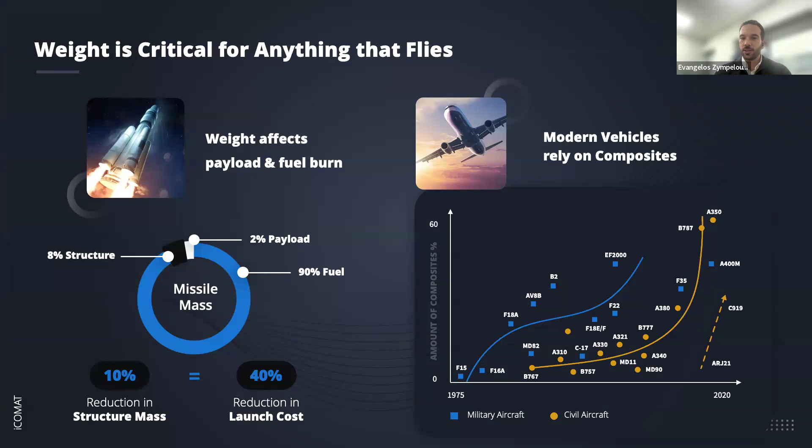And that's what we can deliver with iCOMAT. We can do so for the entire structural stack across defense and civil aviation, so anything from the wings of a fighter jet to interstages of commercial launchers.

And the way we do this is really by going back to the basics with carbon fiber and composites. As we all know, every composite part starts life as a textile. Composites are made of millions of very strong fibers. And really the peculiarity with these materials is that they are only strong in the direction of the fibers.

So the way we design and manufacture today to really compensate for this is by stacking straight fiber layers at different orientations, and this gives us roughly the same strength in the key directions. But the structure is never loaded the same in the key directions, so you end up placing a lot more material than you actually need.

It actually would be far more efficient if you could steer the fibers, and in such a way you could reinforce a structure only in the critical areas. This could give us components which are not only lighter and perform better, but also require significantly less raw material, so they are cheaper and faster to produce.

So this whole idea, this concept, got known as fiber steering in our industry. It was originally proposed by NASA in the late 80s, and there's quite a big body of literature on why fiber steering is better and why we should be designing and manufacturing composites like this. But the big bottleneck always has been manufacturing.

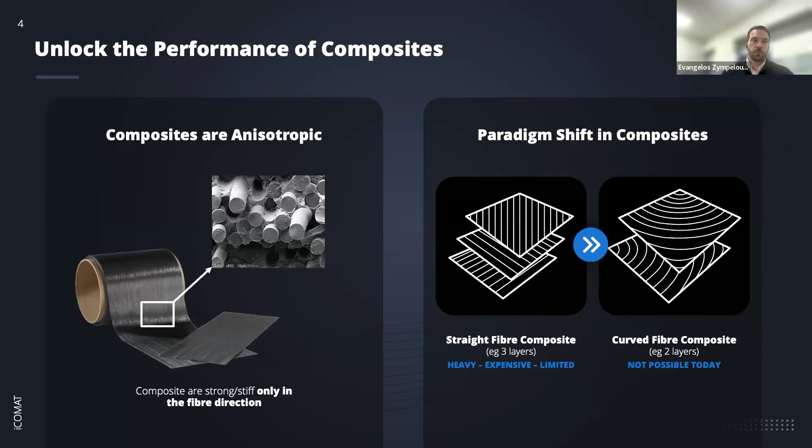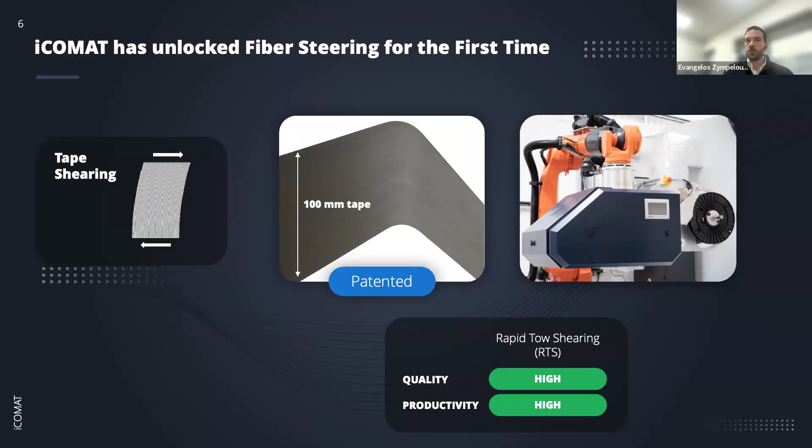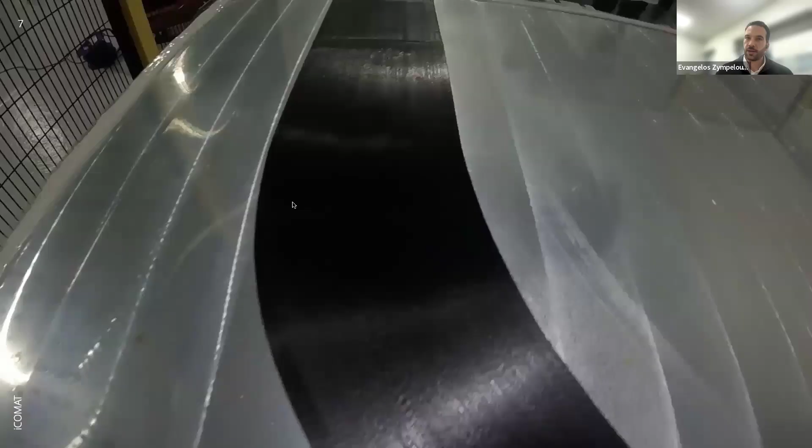So you see here our generation 1 system, steering 4 inches wide, aerospace grade prepreg. This technology is based on 10 years of academic R&D at the University of Bristol, and then 6 years of industrialization at iCOMAT. And as you can see from the close-ups, really the quality is excellent.

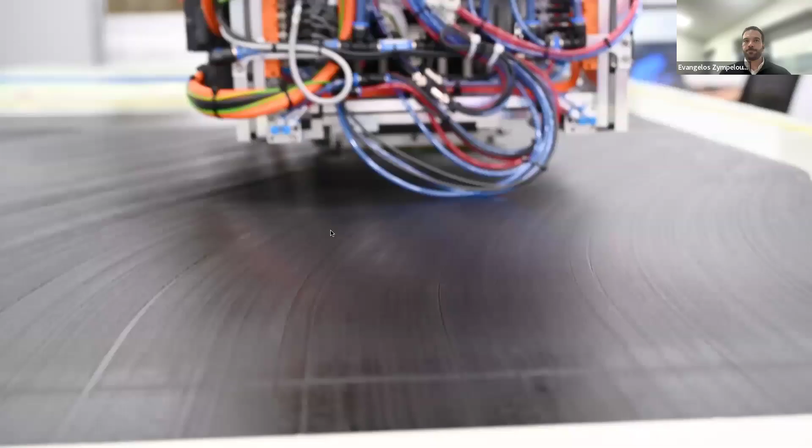For those of you that work with AFP, the difference with our process, aside from individual tapes, is that you can also place one tape next to the other steered tape, without any gaps or overlaps. Again, something that is not possible with existing processes. So all in all, this is the world's first technology that can actually produce defect-free fiber steered parts.

And what you see here is a generation 4 tape lay-up system. This is our latest machine, which we released about 2 weeks ago. And what you see here is straight line deposition at 1 meter a second. A fiber steering demo will follow.

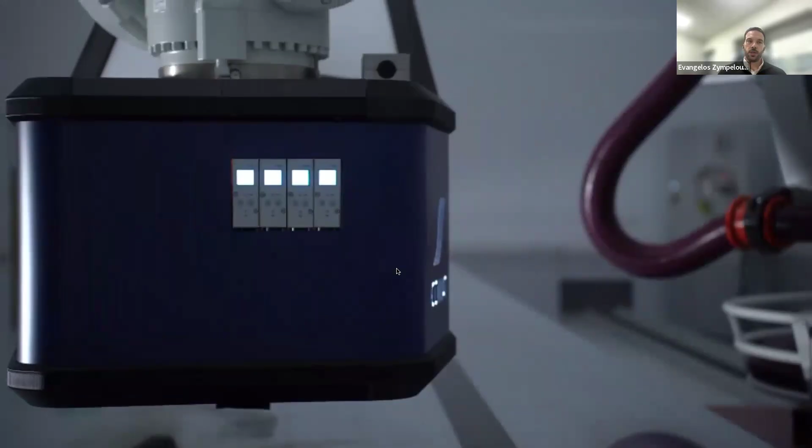Now I have to stress, because with our process we have to effectively modify the tape to steer its fiber path, and we do this by using shear deformation. Every subsystem of the head had to be developed to an extreme level. To give you an idea in terms of heating, it's the only tape lay-up system in the world that uses an infrared LED heating array, about 150 individual LEDs, and this gives us tremendous control over the temperature profile.

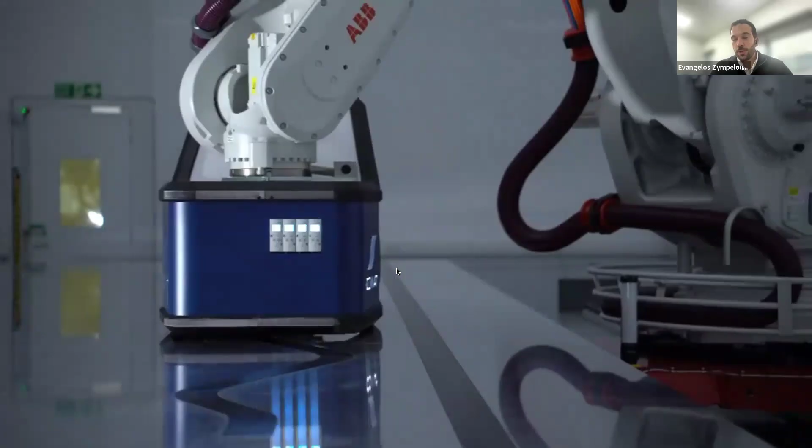So what you see here is quite phenomenal, actually. It's steering at 0.7 meters a second, and the radii that you see are less than 200 millimeters. So it's orders of magnitude faster and tighter steering compared to an AFP, and is absolutely defect-free.

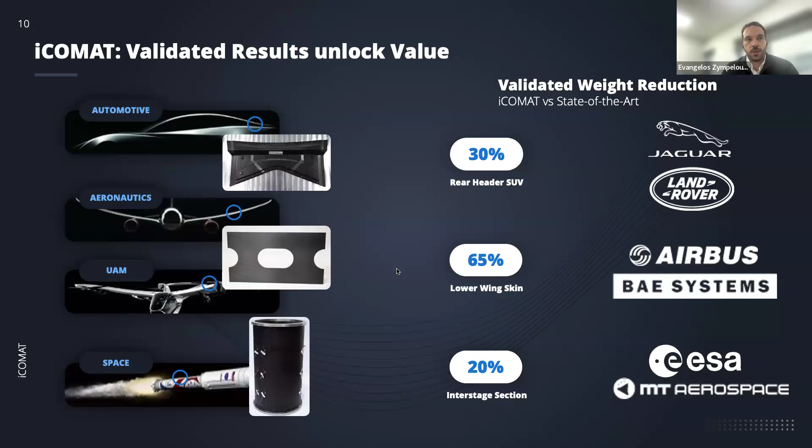So why does this matter? There are two really good reasons. The first one is structural efficiency. By placing the fibers directly on the load path, we can drastically reduce the weight of structures. And it's best to illustrate this with an example.

So what you see here is work we did with Airbus on a program many years ago. It's the lower wing skin of an airplane. You've got what is known as the manhole plank, so literally a man has to crawl through these holes to inspect the fuel tanks and internal structures. But the wing is loaded in bending, so you want the fibers running straight across the length of the wing. But you've got all these holes and you're effectively cutting the fibers, which creates a huge stress concentration.

Now, it's not hard to imagine what we're doing with steering. We're effectively steering the fibers around the hole to eliminate that stress concentration, and that allows for a drastic weight reduction. We're talking 65%, and that's using the same raw material that's used in production today.

So they liked it so much, they said, okay, can we try to replicate that design with existing fiber placement systems that we use today? And the result is what you see on the bottom left-hand side of the slide. It's full of localized buckling and wrinkling, which are localized defects that not only reduce performance, but also make it almost impossible to certify.

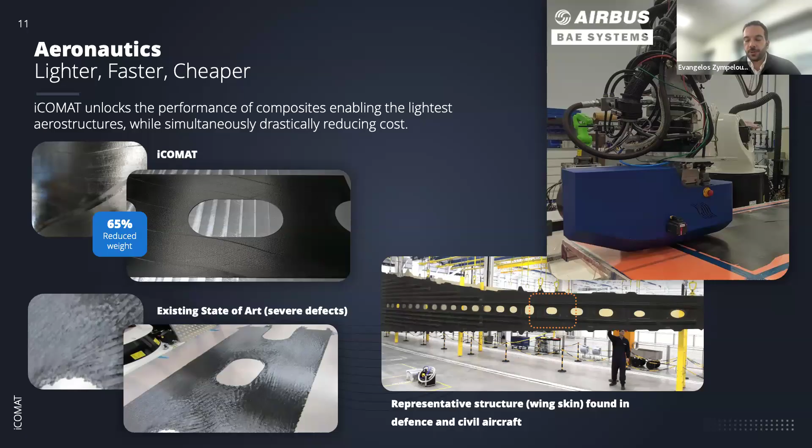And these are some of the results. So with our technology, which is RTS, which stands for rapid tape shearing, we're able to achieve 3 times the load to mass ratio compared to the QI laminate that's flying today.

And we've done a lot of work also on similar structures for space, which was one of the very first applications of fiber steering. We've recently produced and tested the world's first fiber steered cylinder that outperformed the best straight fiber design. The benefits were very well documented in the literature, but nobody could realize them in a test result because of the defects you get when you manufacture fiber steered structures. But we actually did a defect-free cylinder, achieving 24% higher buckling load, which translated into about 20% weight reduction.

And crucially, we massively improved the reliability load by 300%. I won't get too technical, but effectively this is a key measure in space structures, which determines how sensitive the structure is to imperfections or damage. So effectively, it's a much safer way to design with steering because you know exactly how the load travels through the structure.

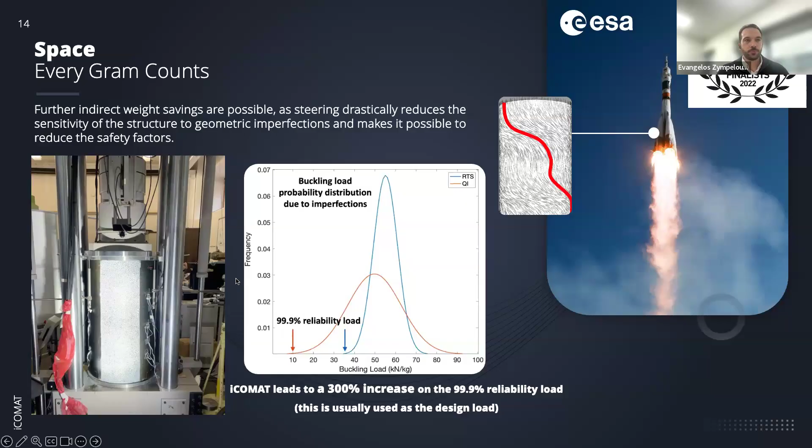Now, the second advantage of steering, and probably this is even more important, is that with this technology, you can really unlock industrial production rates with composites really for the first time. And the way we do this is by leveraging a workflow that's been used in automotive for decades.

So the way we make cars today is by stamping or forming. We take sheets of metal, put them in a press, and off comes a component. This works really well with metal because metals can stretch in all directions, but carbon fiber doesn't stretch. So if you try to form anything complex, like the fuselage of a fighter jet, it's really like taking a piece of paper and trying to wrap it around a football. It will create lots of wrinkles.

So what we do is use software to predict where those wrinkles are, and then we pre-steer the fibers in 2D so that you can stamp form the component in 3D without any defects. So we can effectively engineer stretch into the 2D preform, and that allows you to produce many times faster.

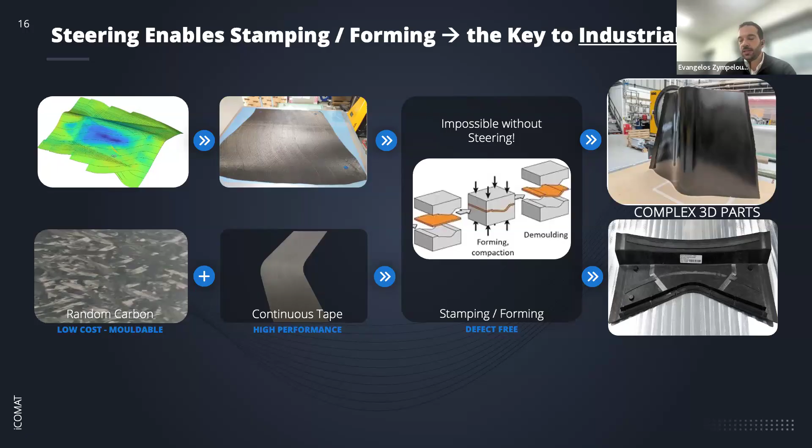So again, best to illustrate this with a couple of examples. The first one is a fuselage frame, or a curved beam. It's a representative geometry that's widely found in civil and defense aviation. You've got about 900 beams like this reinforcing the fuselage of a commercial airplane, and you've got many curved beams in the wings from spars and ribs.

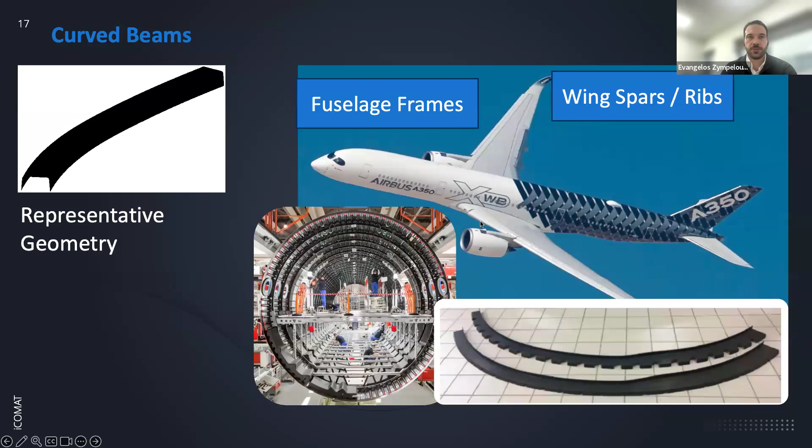Reinforcing the wings. So effectively what we did here is we didn't change the design. On the final 3D part, it's the existing QI design that's flying today, because that was one of the requirements of this project. But what we did is we took that plybook and from a 3D geometry, we projected it into 2D.

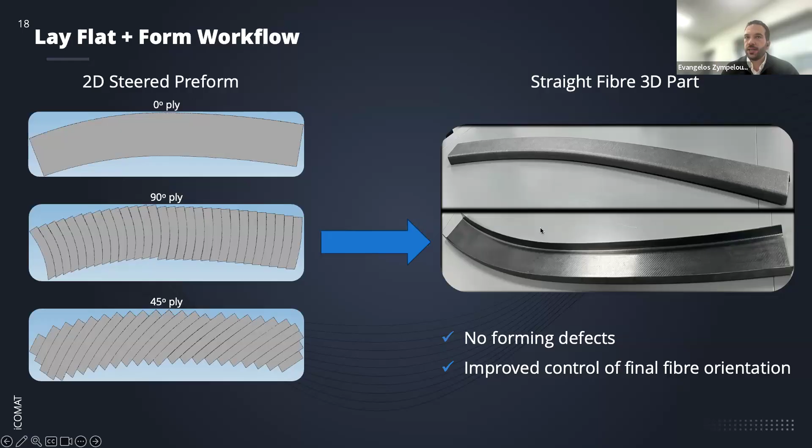You will see here that pretty much every single orientation required a degree of steering. That happens because this is a doubly curved shape, so when you try to form it, the fibers are moving. So we're pre-steering in 2D so that the fibers end up in the correct place on the 3D.

Once we do this, we use our CAM software and program the machine, and let it run. In this case, it did about 21 layers all in one go. Also, you'll notice we have nested multiple frames together.

So this preform here can do about 3 fuselage frames. Then we ply cut its preform, and in this case, we use the hot drape forming system. The result is a defect-free beam that you see here.

Now, if you try the same workflow with a straight fiber preform, everything is the same—material, forming system, mold, everything the same. The only thing we change is instead of a fiber steer preform, we started with a QI preform.

And this could be the result. It would be full of localized wrinkling and buckling, which are these defects I mentioned previously. So this workflow that you saw is really not possible today.

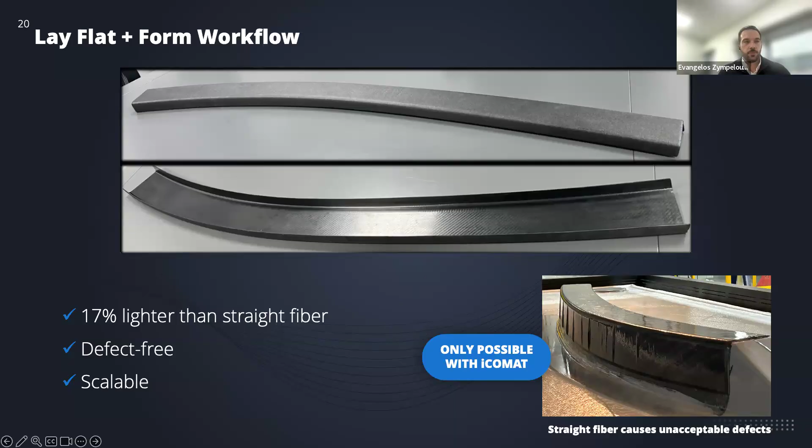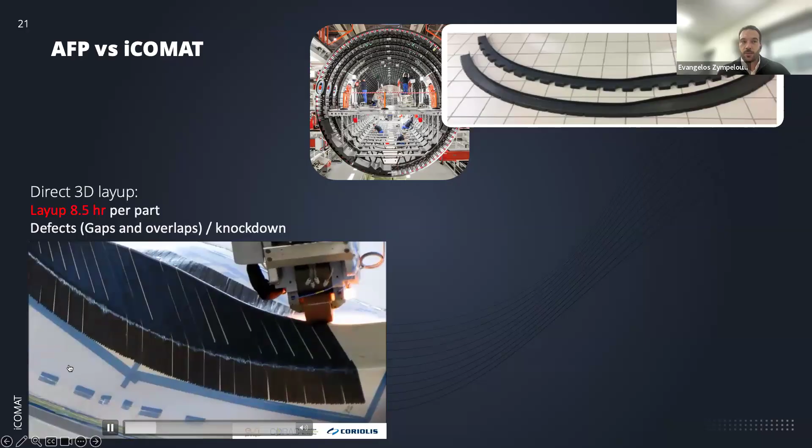One of the most common ways of manufacturing these frames is using direct 3D AFP. The issue is, if I freeze here, you see there is a lot of localized buckling as you move from one face to the other, irregular gaps, which effectively, to certify the structures, the most common way is to add about 30% more material to improve the allowables.

But aside from that, added weight and waste, it's also very slow. It takes about 8.5 hours to do 21 layers using this system.

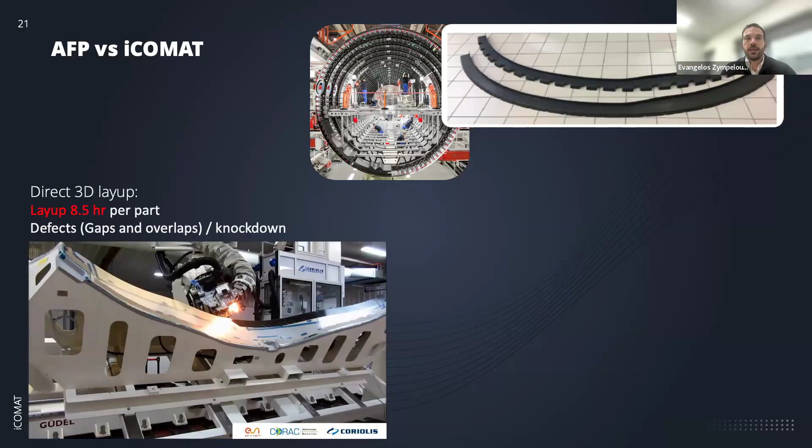So if we use our lay, flat, and form approach while using very wide tapes—we're talking 8 inches wide—then we can do the layup for one frame in about 5.2 minutes. So this is really going from 8.5 hours to 5.2 minutes.

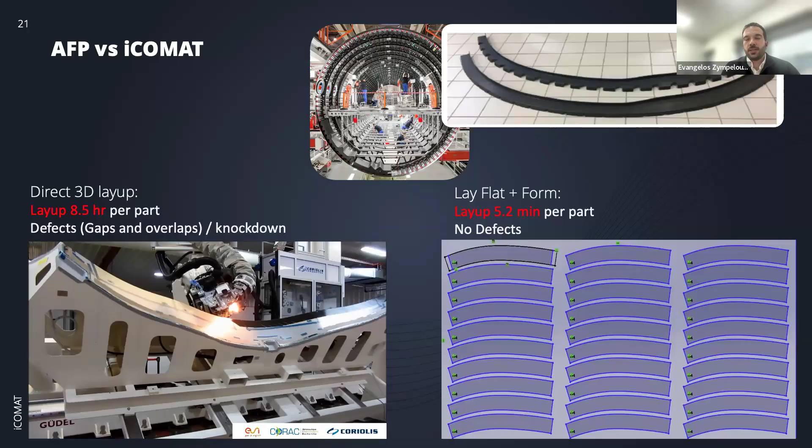Here you have defects, here you have no defects. So we're not talking about a 2% improvement here. This is an order of magnitude improvement in terms of production rate and also cost.

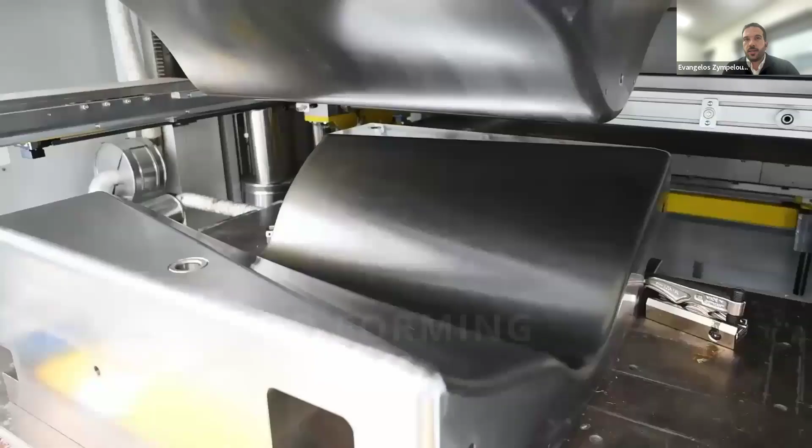Another quick example, this time from the rear fuselage of a fighter jet. Same approach: we do the design, then run a forming simulation, do the flat stack, and in this case use a stamping system. This is a heated press, so you cure while you press at the same time, and really it's beautiful. It's lighter, it's cheaper, and we made this 10 times faster compared to the nearest technology.

So where are we going with all of this? Really, the vision here is to create the world's first lights-out factory for composites. We're not there yet, but we have all the necessary building blocks now. And there are two main streams.

The first is the hardware. I believe we're the only manufacturer in the world that makes their own tape laying systems in-house. This is a key part of our technology stack, and it's the only tape laying system that can fiber steer, which makes all of this possible.

And then everything else we buy commercial off the shelf. We also have a dedicated software team that creates what we call an end-to-end digital thread that connects the CAD, finite element software, forming simulation, and the programming of the machines.

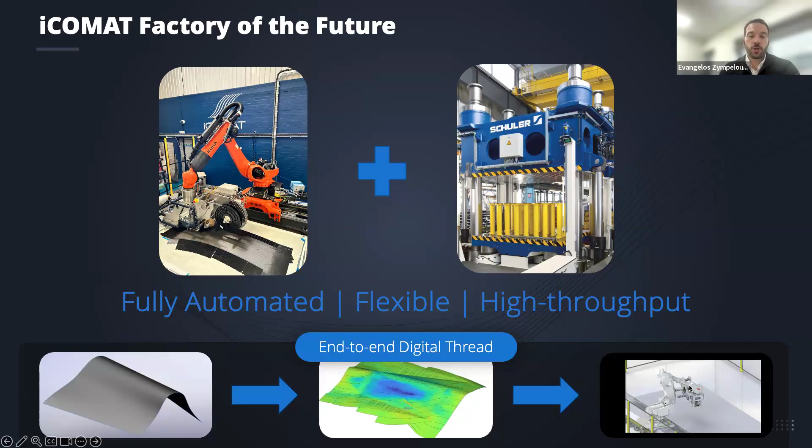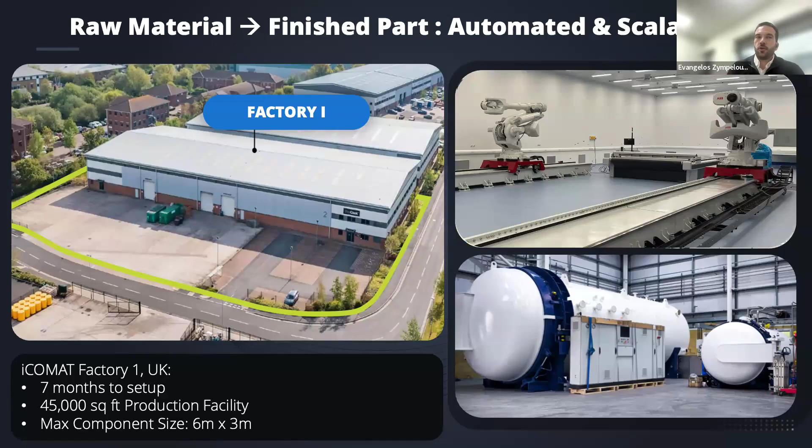So we developed our first factory, which is in the UK. We call this Factory 1. We did this in really no time—it took us 7 months from the moment we signed the lease. It's 45,000 square feet and it has end-to-end capability. So you can literally go from the raw material and now it becomes a finished component.

I'll give you now a quick preview of the capabilities. As I said, we have a design and software team, so we can do pretty much any design step that is needed, from the initial CAD all the way to having the machines programmed.

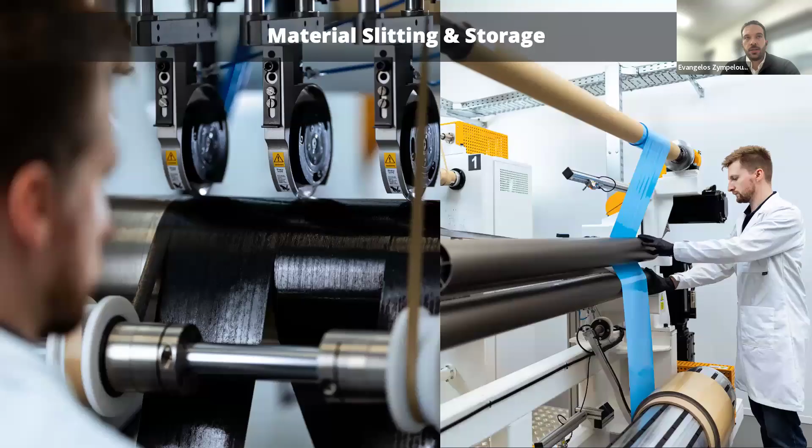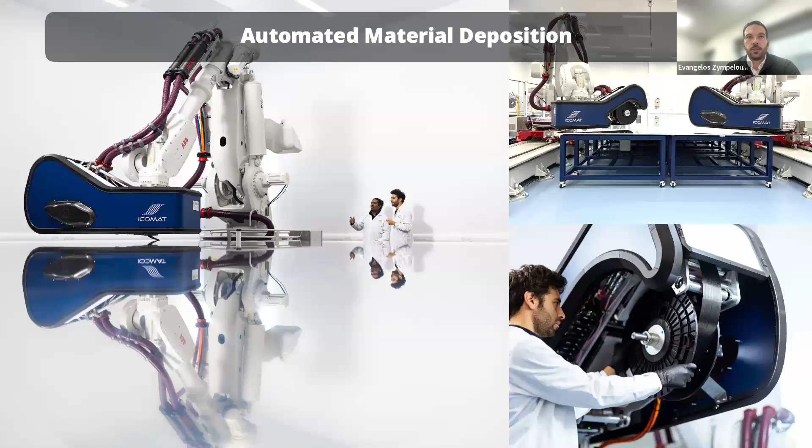We have slitting capability, so we can take the initial parent roll and slit it to narrow widths that fit into our tape laying systems. We have the capability to do tooling, whether it's metal or composite. We have multiple tape laying systems—about 4 live at the factory, and they're all fabricated in-house. This will soon be 6.

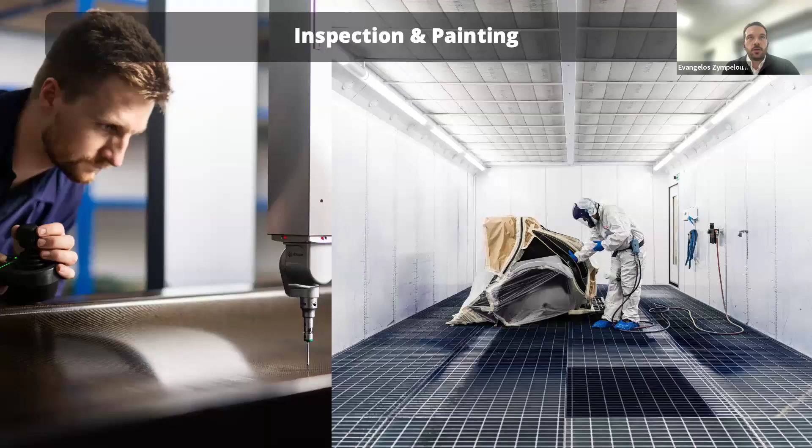Two large autoclaves, two presses, a hot drape forming system, a lot of inspection capabilities, and we even have a paint booth. And lastly, a very large clean room that can also do manual laminating. So as I said, the whole idea here is that we have complete end-to-end capabilities, from the raw material to a finished component, painted and inspected.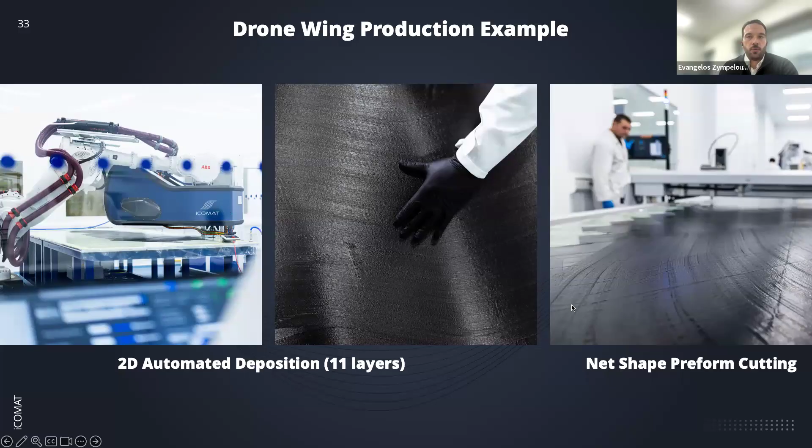I'll give you a quick preview of how this could work for the production of a drone wing. After the initial optimization, we program the machine and let it run. In this case, it did 11 layers in only one go. Then we use a ply cutter to create a net shape preform, laser projection to align it on the mold, and then we cure it in the autoclave. All these steps, aside from moving the preform from one station to another, don't require manual intervention. That's the workflow we want to refine to create the lights out factory.

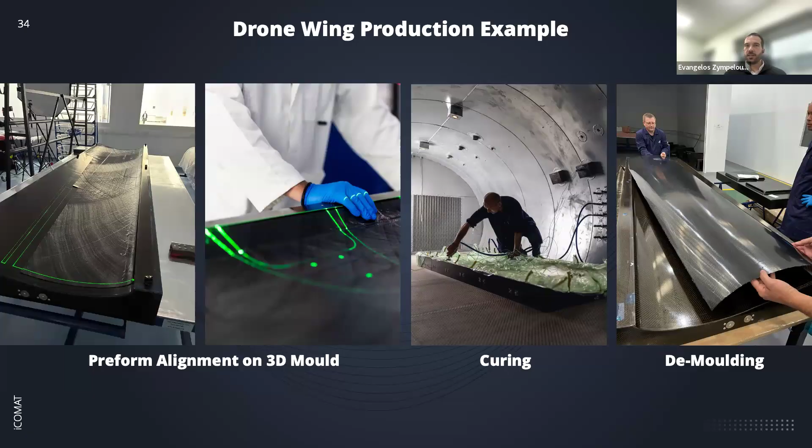So this is a quick preview of our technology and capabilities. In terms of the company and its size, we're about 80 people now. We've got an R&D center in Bristol, our factories in Gloucester, and a software team in Athens. We're in the process of setting up our initial facility in the US.

All this was made possible by a funding round we completed last year. That was our Series A, and it was actually the largest Series A ever in composites. It was led by a US fund called 8VC, and it was the first direct investment of NATO into a private business. We will be raising again early next year with Series B. Our main aim is to set up Factory 2, which will have the latest generation of iCOMAT systems and will take us all the way to a lights out factory.

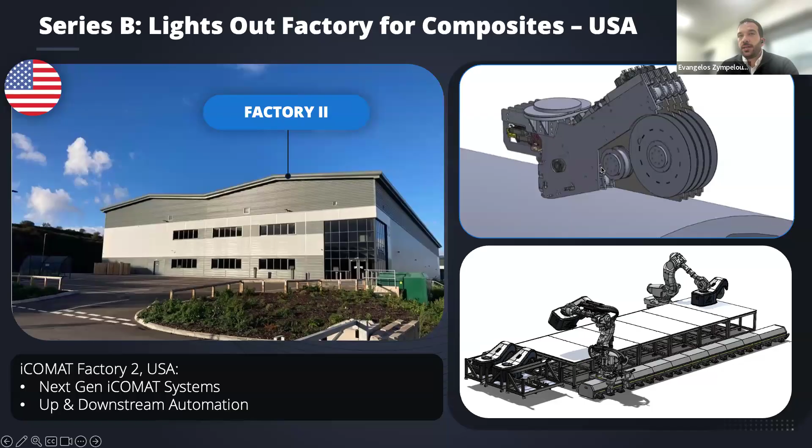So this was a quick presentation on iCOMAT. I think, Jason, we have time now for some questions, if there are any.

Quick question for you: is this applicable to both thermosets and thermoplastics? And can you speak a little bit to the types of materials you've worked with?

At the moment, we're working primarily with thermosets and dry fiber. We have worked with thermoplastics, mainly some systems by Victrex, which are relatively low melt for thermoplastics. The technology is applicable for thermoplastics, but we haven't developed a dedicated head for it. So we're focusing on thermosets and dry fiber, and there is potential for thermoplastics.

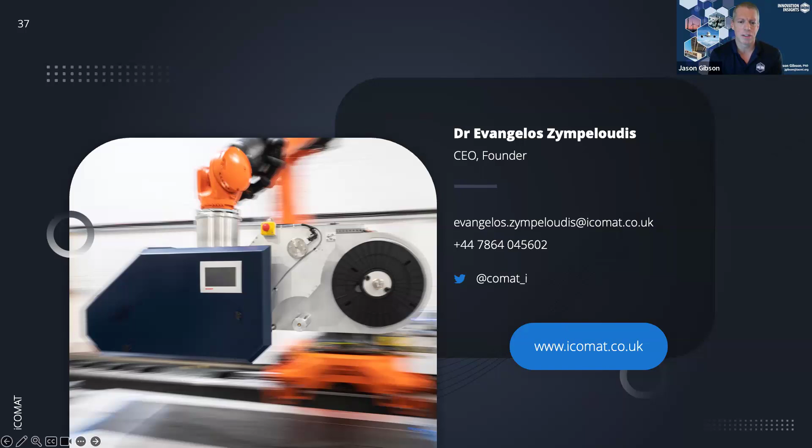Well, thank you very much, Jason. And Evangelos, great presentation. Let me share my screen. Hopefully people can see that. Yep, we could see it. It looks great. Okay, good.

I wanted to talk about our optical metrology technologies, utilizing AI to do digital measurements of materials, structures, and processes to really bring quality upstream in the manufacturing process, making manufacturing substantially more efficient with less rework, scrap and defects, making better quality parts as we move forward, applicable to all composite workers.

Thank you, IACMI, for putting this on and allowing us to present. Trilion has been in the industry for more than 27 years now, and this is our headquarters in Philadelphia, but we have offices around the country, and we also do workshops all around the country too. Not only providing our systems, but doing engineering services to support our customers in implementation and ongoing training, all that kind of thing. And we're teamed with Carl Zeiss, and people may know the GOM products from that.

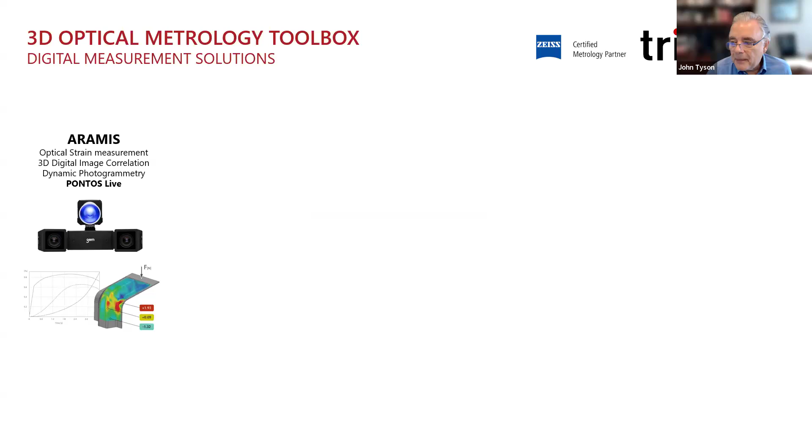We have a couple of different technologies we work with. Core is our Aramis optical strain measurement tool, where we can see the deformation and strain in materials, full field and holistically. We also have scanning methods with a laser scanner and a white light scanner, looking at the overall shape of components, matching them to CAD during the building process. Our tritop gives us coordinate system and global displacement and positioning of things. And SuPAR gives us augmented reality, allowing interactive inspections on components and structures.

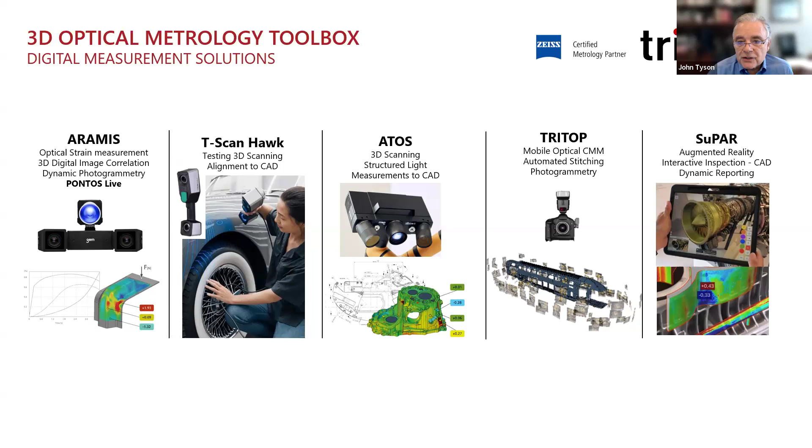We couple Aramis with high-speed cameras to look at drop tower manufacturing operations and other high-speed events, and thermography to bring the temperature profile in, which leads us into manufacturing operations and looking at the formability of components, the layup of composites, and that kind of thing.

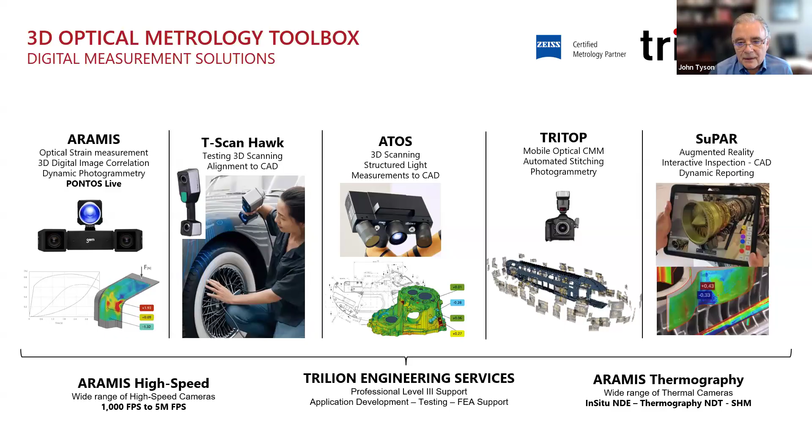Coupling all of this is our engineering services, and hence our local offices around the country and around the world. Our engineering services are crucial to integration of these tools, keeping people trained, and keeping advanced applications being further developed, keeping us on the cutting edge.

We also have our automation suite of technology, which automates all of these tools, and this allows us to make them fully integrated into your manufacturing process in really nice ways.

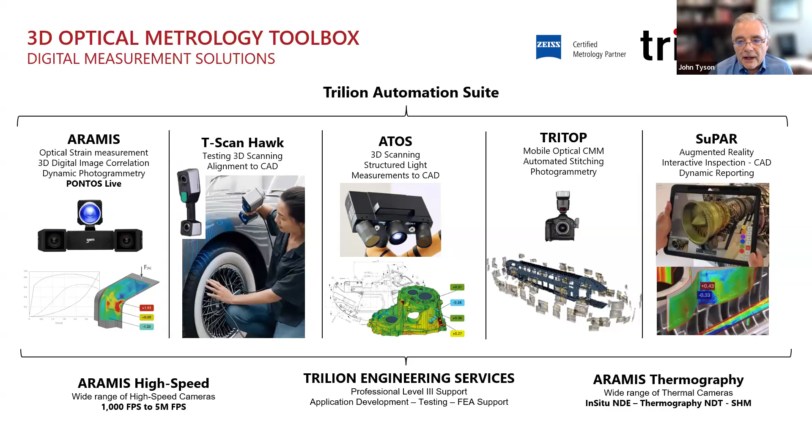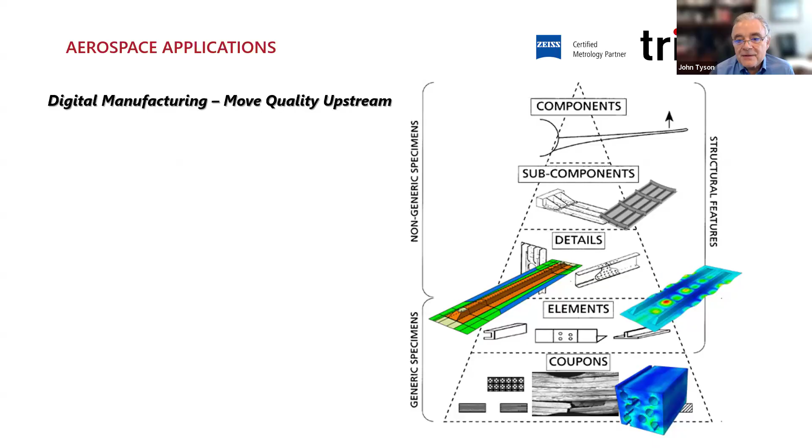Key to our business model is moving quality upstream. How do we improve your quality earlier on so there are fewer problems downstream? This is really digital manufacturing.

Looking initially at materials, your material properties, materials are core to everything we do in manufacturing and core to all new generation products, that kind of thing.

Then understanding your processes and components, being able to do in situ monitoring, understanding your assemblies during the manufacturing process, giving guidance during manufacturing, structural testing, really understanding that you're producing good products out the door, and maintaining the product through its lifetime are some of the key things we're working on.

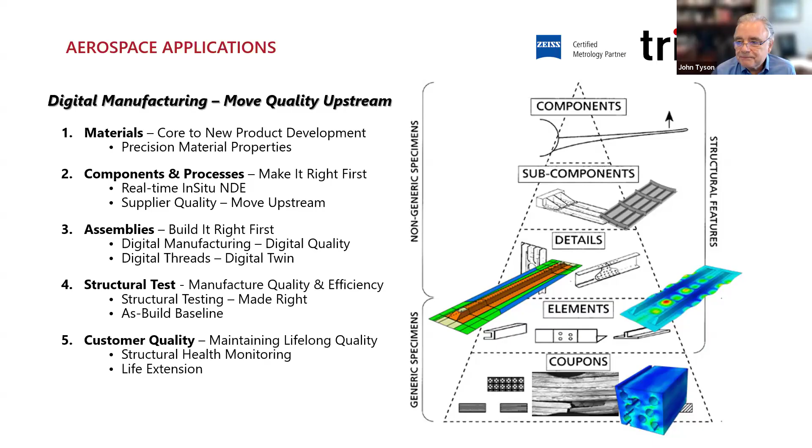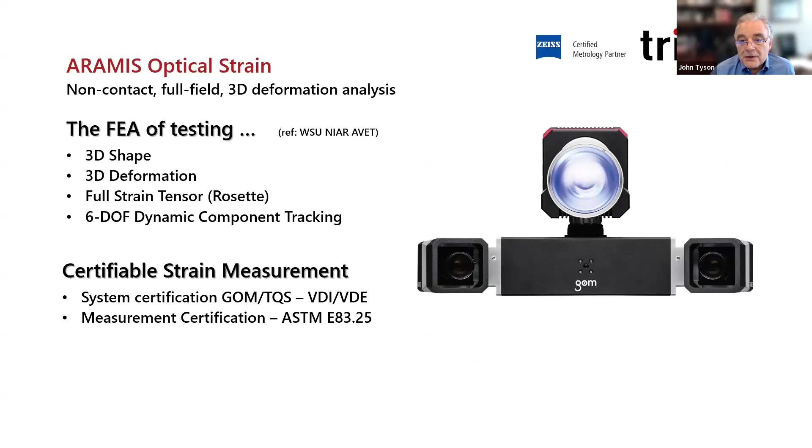Our Aramis optical strain is considered this full field optical capability. We're measuring 3D shape, deformations, and strains. We're now a certifiable measurement to ASTM E83. This becomes just a very nice tool for understanding composites in general.

When it comes to material testing, we've had some breakthrough steps doing this full field measurement. Our equipment's now sort of plug and play, with long-term stability. We have this measurement certification to E83. We're using automated etching methods for patterning, which can be a difficulty sometimes, and automated templates allowing us to automatically make the measurement. So it's really a plug and play system.

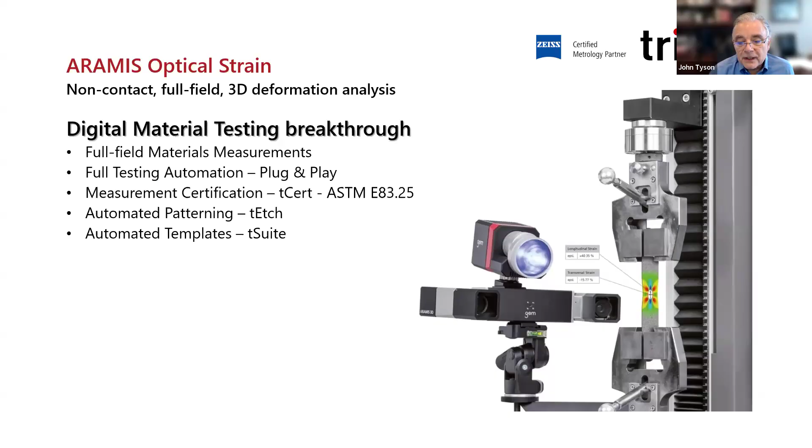We also have our new AI sensor, which allows us to do real-time measurement in material testing, getting axial and transverse strains, just replacing analog gauges with full field optical methods that give you much better understanding of your material properties, and hence a lot less testing and a lot higher quality data.

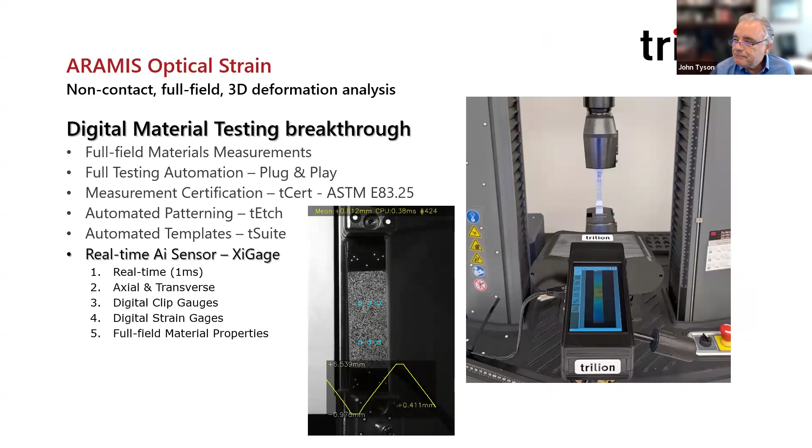When you're dealing with materials, even composites particularly, but also metals and everything else, there's much more happening than a clip gauge or a strain gauge is showing you. So we're giving you automated stress strain curves, all your material testing parameters, and NASA Glenn stated that Aramis gives the most consistent material properties of any method.

Getting these material properties is crucial to the beginning of your processes, but then doing in situ NDE, monitoring the quality while you're building your product, final inspections, alignment and digital measurements, final structural testing, and then structural health monitoring in the future. This process of monitoring your processes all the way through manufacturing moves quality upstream, providing higher quality and more manufacturing efficiency.

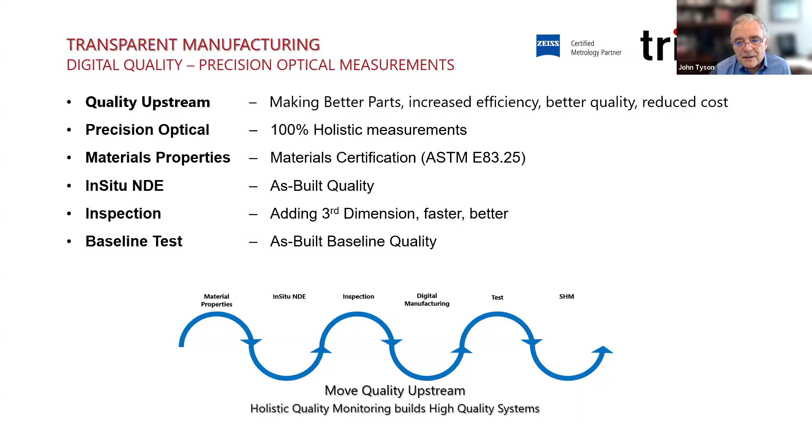Getting full field measurements, getting your material properties, in situ NDE, as-built quality, and doing final inspections in three-dimensional space rather than 2D space really provides a much better measurement all the way through your processes. And then we can add structural health monitoring for lifelong monitoring of your components and structures.

Engineering services are key to our business. We support a lot of customers all over the country and the world, really understanding how advanced processes are working.

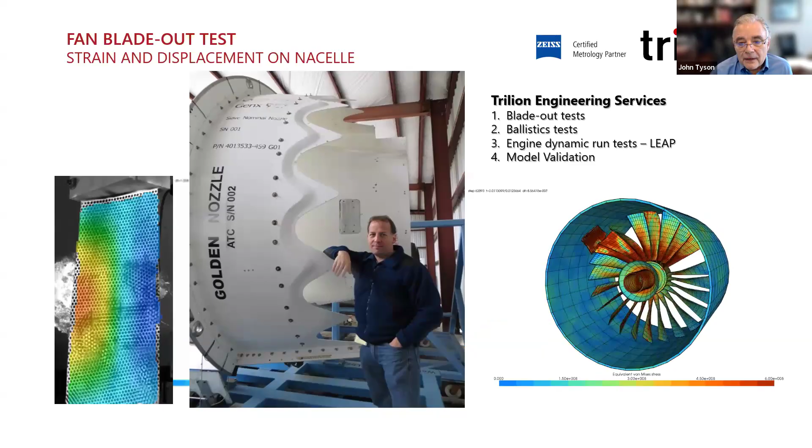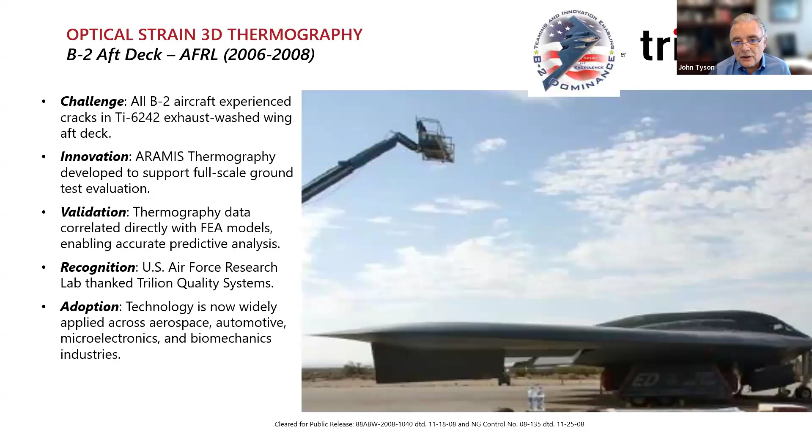One application was developing our Aramis thermography back in 2006, where we coupled the thermal camera with the Aramis to measure not only full field deformation and strain, but the temperature change during the same time, using that to calculate thermal expansion and correct strains to get the true mechanical strains.

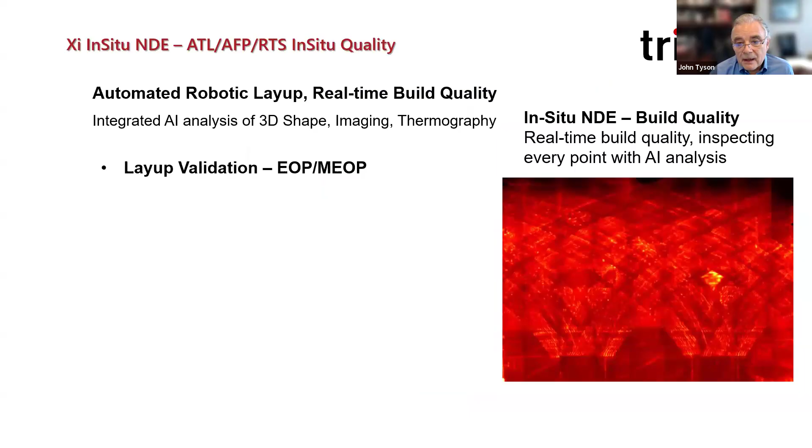We then applied this to in situ monitoring during composite layup. Here we are monitoring the layup of the build, fiber alignment to CAD, FOD detection, looking at voids and FOD inside the structure. Backing material and things like that, which are the bane of composites layup, we can detect this in real time, including fuzzballs and all that kind of stuff.

This lets you ensure build quality assurance while you're building, with full field NDE, documenting all of this in real time.

We get into initially fiber alignment. We can see the fibers themselves in the measurement locally and globally, comparing that to CAD. We can also do defect maps of laps and gaps, FOD, voids, all that kind of thing, fully documented on the builds while you're building them.

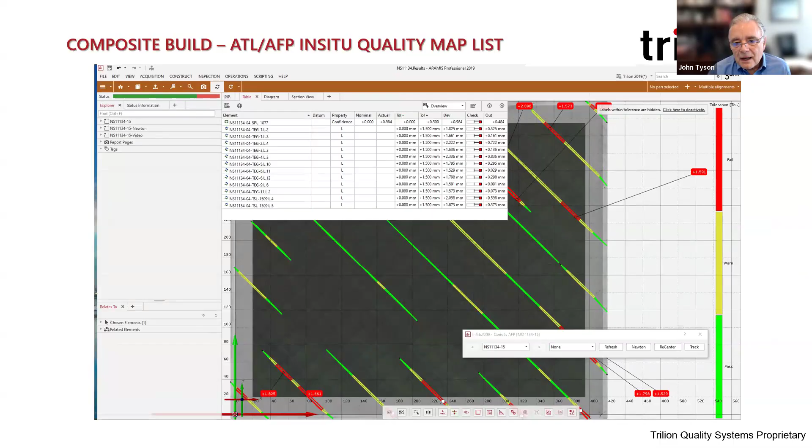We give you a list for the quality manager to accept or reject any of these. And we're doing this in real time, so you can be fixing problems in real time while you're building the parts.

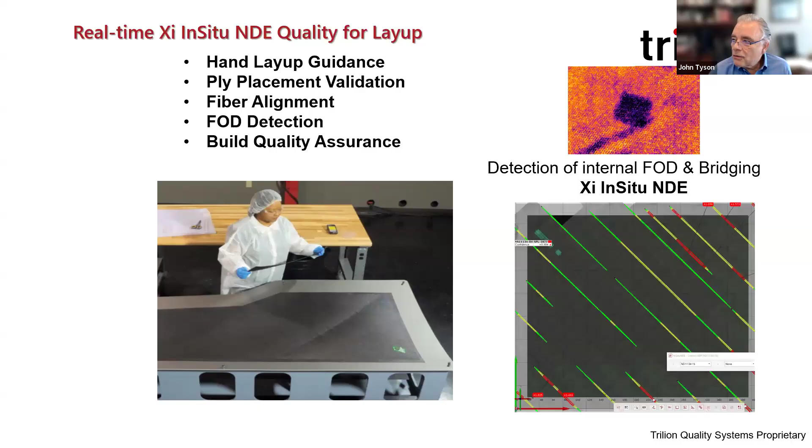We can also do this in hand layup, doing the hand layup guidance, ply placement, fiber alignment, FOD detection, all critical, getting this quality assurance while you're building your part, and documenting all of this in your quality control systems.

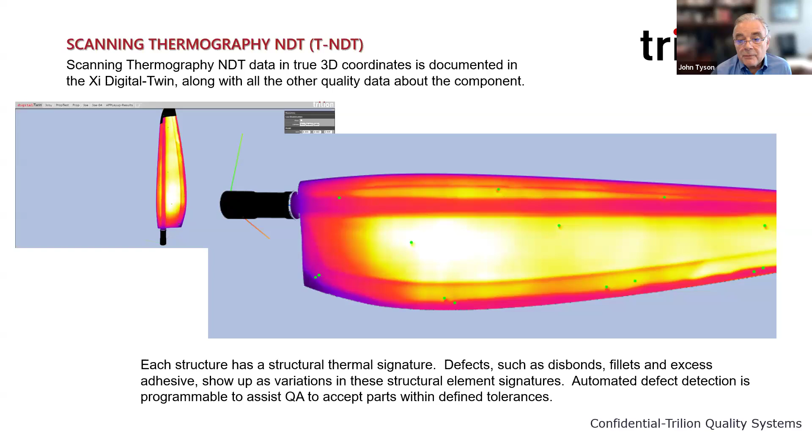We can also do scanning. In this case, we're doing scanning thermography, looking at this composite structure and seeing the bond lines all the way through - the trailing edge, leading edge, spar - very rapidly, typically with the same equipment you've been doing the other measurements with.

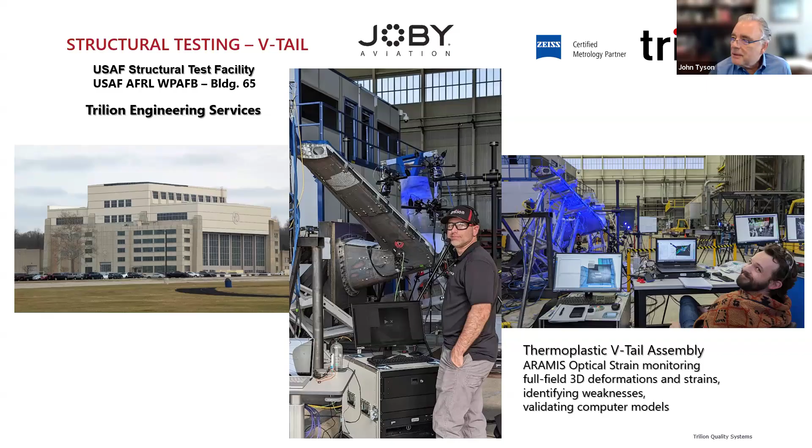So monitoring this transparent manufacturing, through the process from materials to in situ monitoring to inspections to guidance during builds, doing full field optical precision alignments - everything from regular structures to click bonds, drilling operations - all optically guided, documented in a precision way.

Really speeding guidance, tooling, speeding the manufacturing process and reducing tooling costs. Then structural testing, and then structural health monitoring, all key areas in this transparent manufacturing process.

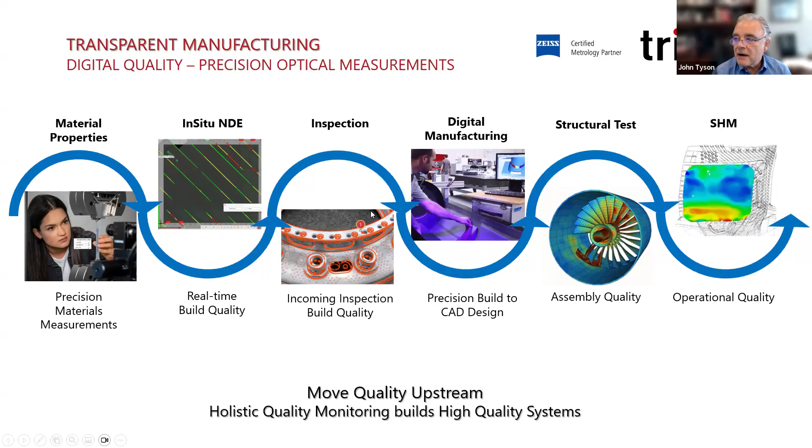This gives you assured quality for rapid manufacturing, certified materials, in situ monitoring, AI-driven defect detection, and rapid scanning with our thermography technology for in situ monitoring as well as NDT.

We end up with this multi-scale quality monitoring all the way through your process, with really closed loop control and monitoring the quality as you're building, moving quality upstream. And then we can do life cycle assurance of these structures also in the field.

So this is my presentation, and I thank you all very much. Any questions or thoughts?

Well, thanks, John. That's very good. Couple questions for you. For the AI involvement in the in situ closed loop type training, there's got to be some type of training involved to the AI. Can you give us a feel for how long that takes, how many data points, just kind of a gauge around that? Yeah, it's amazing.

AI is really just amazing. It compresses reality. We've been training our models for years, and it's just become more and more powerful.

Finding a defect is sort of easy for an operator to see, and it's also easy for AI to find. But we're getting to the point where we're now measuring the shape of a component, the imaging of the component, the thermal response of the component, and accommodated calculations using all that data. No operator can see all of that information at the same time, but AI can see it all at the same time.

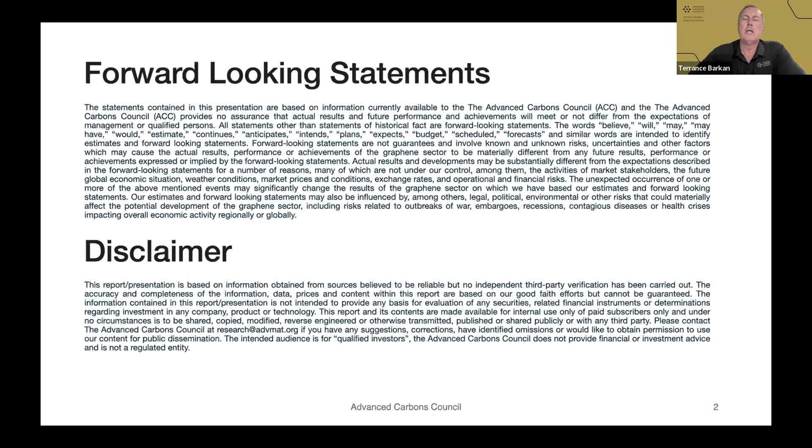Again, thank you for having the Advanced Carbons Council participate here. As Jason said at the beginning, we started as the Graphene Council back in 2013, so we've been at this now for well over a decade. The Advanced Carbons Council is a global trade association, so we have companies that are members, and we have individual subscribers that get our advanced carbon intelligence briefings on a variety of materials, which I'll describe shortly. We reach more than 40,000 materials professionals working with advanced carbons, either producing them, researching them, developing applications, or using them in different applications.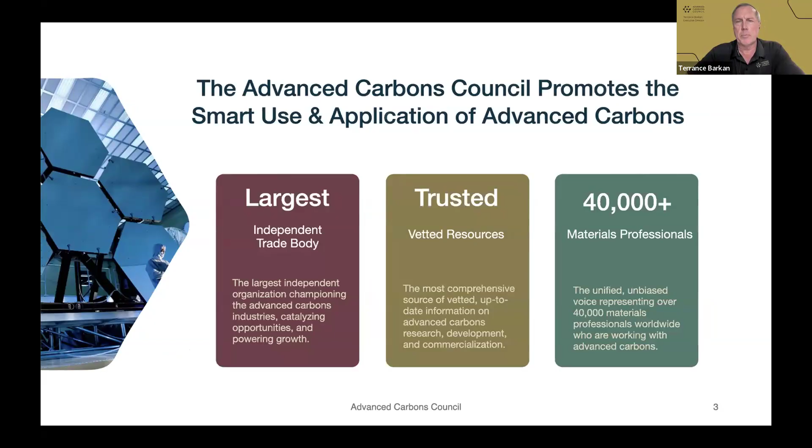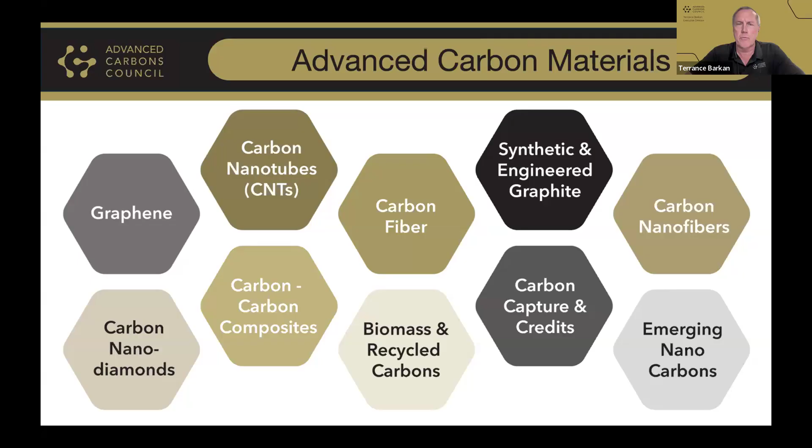From our perspective, when we talk about advanced carbon materials, we're talking about everything you see here on the screen, including nanomaterials like carbon nanotubes, graphene, and other allotropes of carbon, nanodiamonds, but also macro forms such as carbon-carbon composites and carbon fiber, synthetic and engineered graphite, etc. It's really the full spectrum. It's maybe easier to describe what we don't cover, and that would be things like natural flake graphite or petroleum-derived carbon black materials, unless it's a recovered, recycled material. So we cover this full spectrum because there's a lot of synergy between these different carbon materials.

The one I'd like to focus on first is graphene. Often when people hear the term graphene, they may not be entirely familiar with the fact that this is more like a family of materials rather than a singular specific material. Graphene can include sp2 bonded carbon that's in a single layer up to 10 carbon layers, and you have an example on the left of a few layer graphene platelet.

There's also a material referred to as graphene oxide, which has a high percentage of oxygen content, 30 to as much as 40% oxygen, which changes the behavior of the material significantly. Graphene is noted because it's highly electrically conductive, but graphene oxide is an electrical insulator because of the oxygen. There are many different ways of making graphene, not just from graphite as a feedstock, but increasingly graphene is being made, for example, from folks producing hydrogen from a gas, taking methane, or you can take oxygen and acetylene and create graphene out of that.

Using gas precursors results in a form of turbostratic or disordered flakes of graphene. And then lastly, you also have amorphous carbon, which is not graphene, but depending on the Raman spectroscopy or microscopy, it might look like a graphene material, though it's important to distinguish the differences. In the TEM images below, you can see the difference in particular, where we can get right down to the level where you can actually count the individual carbon layers.

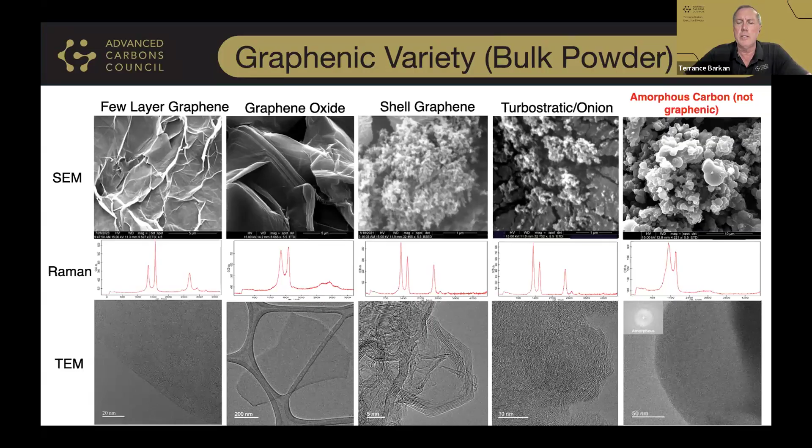I wanted to bring this up because there's been a lot of discussion about graphene over the years and about all the promise of it. In particular, the fact that graphene is highly electrically conductive, highly thermally conductive, extremely strong, provides UV protection, provides strong barrier properties, means that this one material can be used in many different ways for different characteristics. So exploiting either the electrical conductivity or the thermal conductivity in a given application means it can be applied across a really wide range of applications.

That's the exciting part. The challenge has been, as a relatively new material, that it's been perceived as being prohibitively expensive to use. That was the number one barrier in many cases. You would have heard early press releases about this costing $100,000 a kilo or something crazy like that.

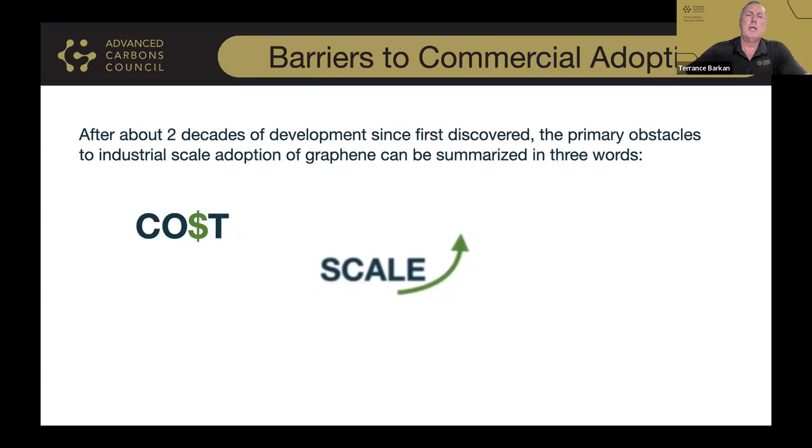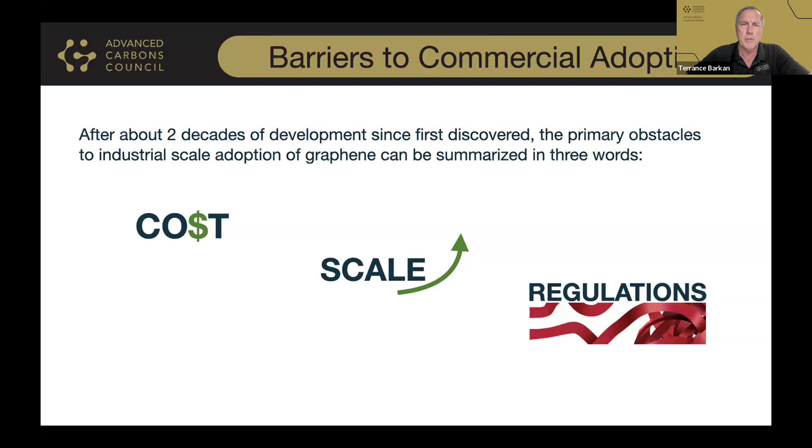So cost has been an issue. The ability to scale at the levels needed for commercial or industrial use has been an obstacle. And because this is a nanomaterial, at least in the United States it's regulated under EPA TSCA regulations, and in Europe under REACH regulations. These three factors, the perceived cost of the material, production primarily by small scale or startup companies rather than at industrial scale, and the regulatory burdens, have been the primary reasons why graphene has not been deployed extensively to date. What I'd like to say is at this stage in 2025, all three of these obstacles are being addressed, and commercialization of this material is now taking place.

If we look at pricing, because graphene is a family of materials, you have to compare apples with apples. Making a true single atomic layer of graphene results in one type of material with a certain cost basis, and it's more suited for specific applications like sensors or electronics. As you add layers of carbon up to 7, 8, 9, 10 layers, you get different applications, more mechanical properties, and the cost comes down. I'd say pricing for graphene is extremely volume dependent, so there's a huge difference between buying a gram, a kilo, or a ton of the material.

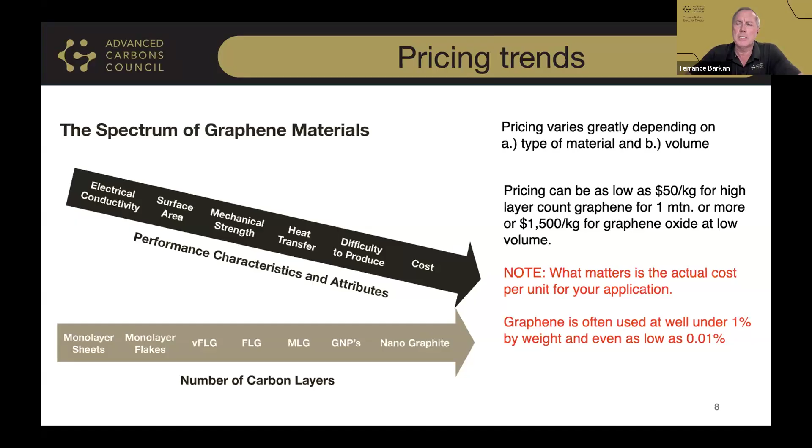But the really important aspect to understand is that in almost every case, graphene is not used by itself. It's used as an additive for another component, especially in composites, where graphene might be in the resin system and used at a fraction of a percent. Ultimately, what people need to look at is not the cost on a per unit basis for the graphene, but what it costs to put graphene into your system to get improved tensile, flexural, or impact resistance for the component you're adding it to. You could have two different types of graphene, one of which you use 1/10 of the other, and that has a tremendous impact on your actual end use cost. Where we're at today, graphene is a very cost-effective additive for composites and can be less expensive than some of the resin systems it replaces.

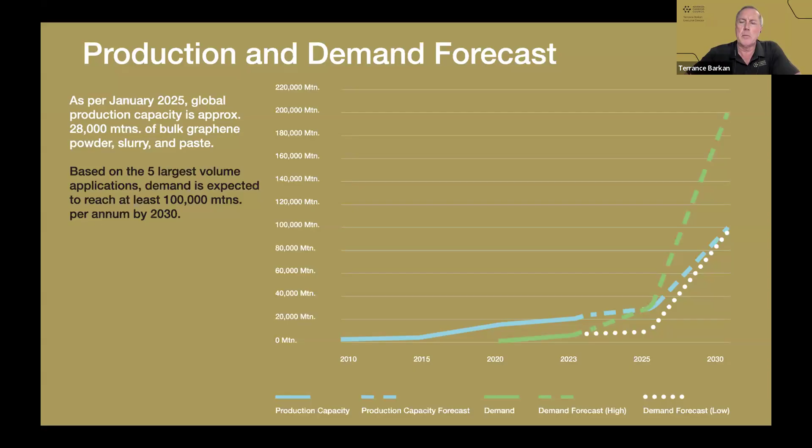If we look at volume, there are more than 200 companies today that make graphene, and of those, a handful make it at extremely high scale and very repeatably. The good news about graphene production is there are no bottlenecks or constraints on the raw materials needed. There are a dozen different ways of making it, so you don't have a technology constraint where one company dominates or throttles production methodology. The constraints from that side are just not there, and it's relatively low capex to set up a graphene production facility. So right now the obstacles to large scale production aren't there, other than a bit of capital and the demand signals coming from end users.

The really important constraint that has been significant, but is being addressed, is on the regulatory approval side. Because graphene is a nanomaterial, it's regulated by EPA under TSCA regulations in the United States and under REACH regulations in Europe. In Europe, a consortia of companies has gone through the REACH approval process, and the entire family of graphene materials has been approved for use there, giving a distinct advantage to enterprises and manufacturers in that jurisdiction. In the United States, the approach has been each company registering their materials one by one, but we've had recent announcements, and there will be more coming, of companies obtaining their TSCA approval for material to be commercialized and used in the United States.

So if you add the cost component, the scaling constraint, and the regulatory approval, all three of these important obstacles to full commercialization are being addressed and tackled at this time, which is a big signal for end users to revisit looking at graphene as a material to make next generation, lighter, stronger, better composite materials.

And we are here to help with that.

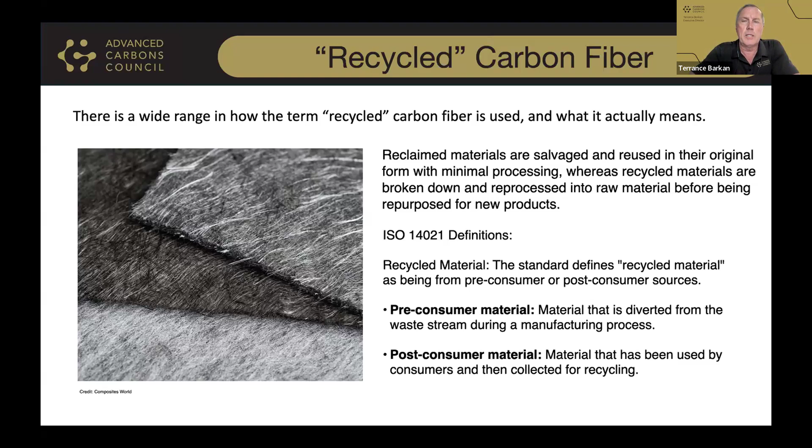If we look at the panorama of reclaimed carbon fiber material, there's quite a bit of variation, and we can look at that from three aspects here. One is the source of these reclaimed fiber materials.

There is a significant stream of material that's coming directly from virgin carbon fiber producers for material that is off spec. Now this might just be a box of spaghetti, or it might be material that's actually on spools, but it didn't meet spec, and therefore it can't be used in their normal sales process.

Then you've got production scraps from facilities making composite parts, and these are the offcuts from the patterns that are not usable. Those are production scraps. And then we have material, for example, end of life windmill spars, where the materials are being reclaimed.

And then we can look at these different processes for reclamation. So you have things like mechanical separation, chopping or milling of the reclaimed fibers. And in the case of reclaimed CFRP product, you might have a pyrolysis method applied to remove the resin and liberate the fiber, or a solvolysis process, a chemical process, to dissolve the resins and again get at the fibers.

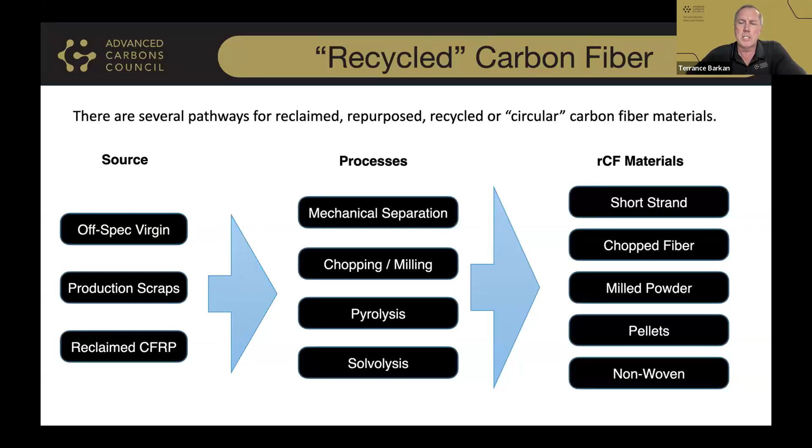What we have seen is that there is tremendous interest and latent demand for reclaimed carbon fiber materials, but one of the biggest obstacles is the lack of consistency or standards for grading systems for the reclaimed or repurposed carbon fiber. There is at this time an ISO draft standard.

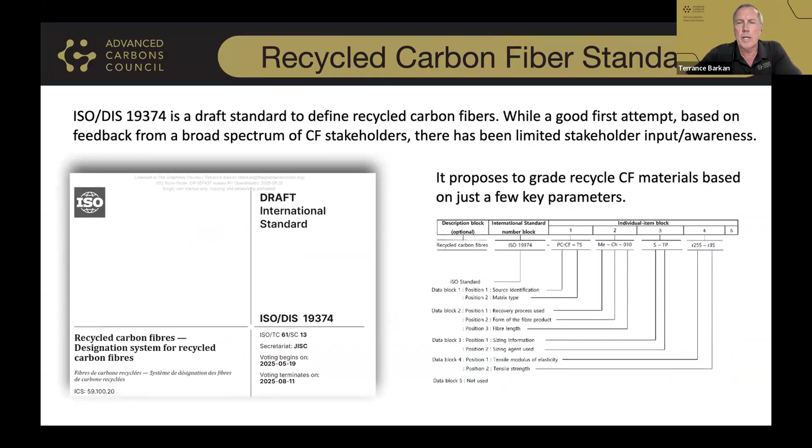The ISO DIS 19374 is a draft standard within the ISO system, and it does have a proposed system for assigning numbers and grades and categories to some of these reclaimed fibers.

However, when we look at it, that standard, which was developed by, we understand, a consortium of three virgin manufacturers, has not adequately taken into account the full breadth and depth of the reclaimed, recycled carbon fiber sector, nor has there been enough input from stakeholders who are in that business.

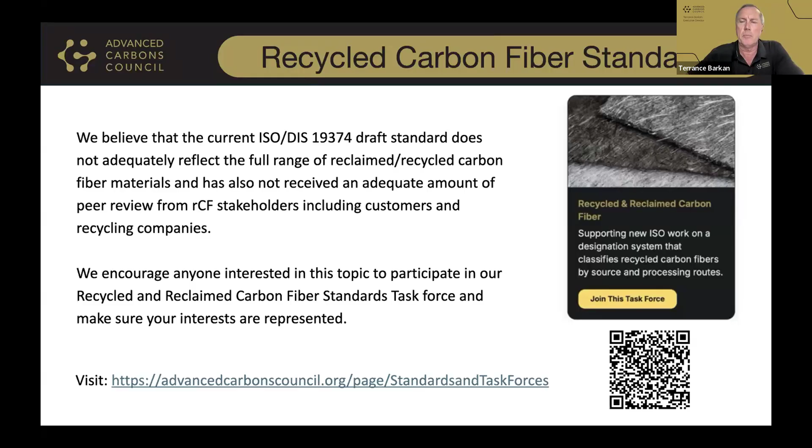And there are new companies every day emerging that are working on how to develop a high quality, consistent, reclaimed, repurposed carbon fiber product. So as the trade association working on standards for these particular materials, this is an open invitation to anyone who has an interest in this topic to work with us on a volunteer task force to help make sure that the standards that eventually are approved meet the needs of the entire stakeholder community, and in particular the end users and potential purchasers of reclaimed, recycled fiber. And so we have a task force for those standards.

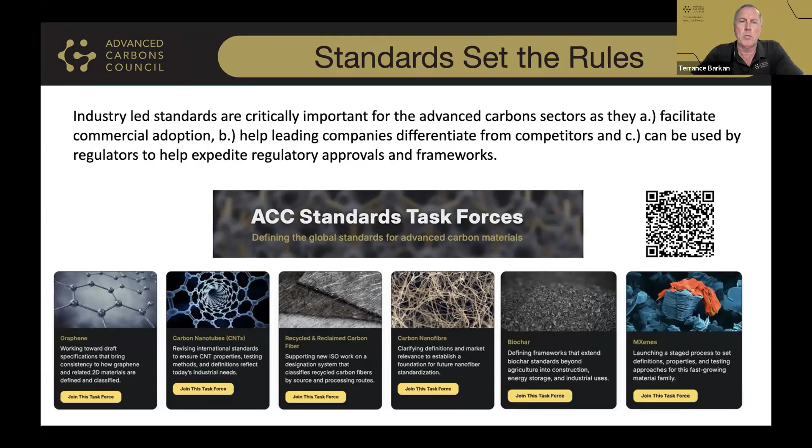We're also working on standards for graphene with ASTM. We did get a standard approved through ISO for graphene classification, and the next step is an ASTM numbering system. There are new standards for carbon nanotubes, or rather existing standards under revision. I mentioned the reclaimed carbon fiber, carbon nanofibers, biochar, and MXenes, an emerging carbide nanomaterial. These are all the standards projects we're working on at the moment.

And with that, I'm keeping my presentation really concise and short, just to share updates on those two things.

The summary is that graphene has overcome the main hurdles of price, scale, and regulatory obstacles to be commercially implemented, and holds great promise, in particular for composites, to help make them stronger, lighter, and longer lasting, as well as more recyclable. And for the carbon fiber sector, it is really important, even for the virgin carbon fiber producers, that there is a good end of life pathway for carbon fiber materials.

I think that's true for any user of carbon fiber or anybody who has an interest in this sector: having a good end of life pathway, which includes transparent, usable standards for grading and classifying those different second life materials, is important. We would like to get everybody's input on that. And with that, Jason, I'm going to hand back over to you.

You mentioned the current ISO standard for recycled carbon fibers doesn't really reflect the broad range of products out there. If you were to ask for the most support, where do you need the most help to get industry involvement to make sure it's reflective of the broad range of different recycled carbon fibers? Are there particular types of companies or suppliers you're looking to bring into that world?